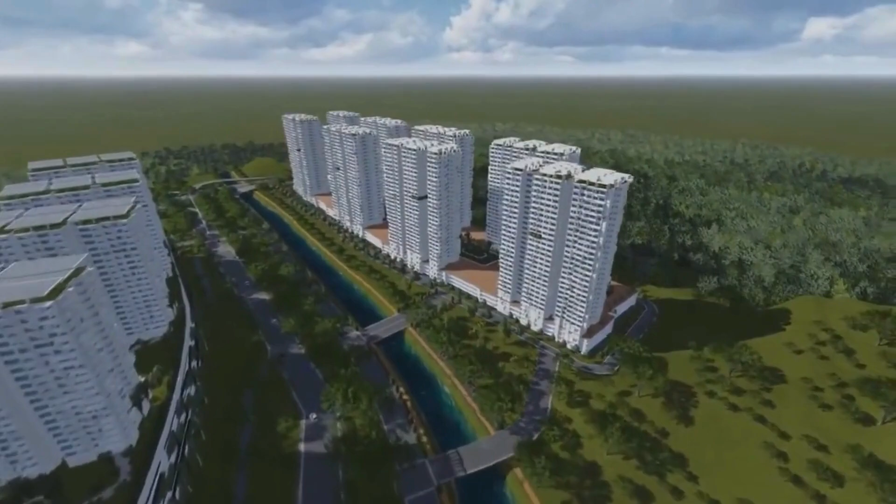In Malaysia, owning an affordable home has become harder for many families, especially those in the middle and lower-income households. One of the biggest problems is that house prices keep rising, while people's salaries don't grow fast enough to keep up. To address these problems, the government introduced PRIMA, or Perumahan Rakyat Satu Malaysia.

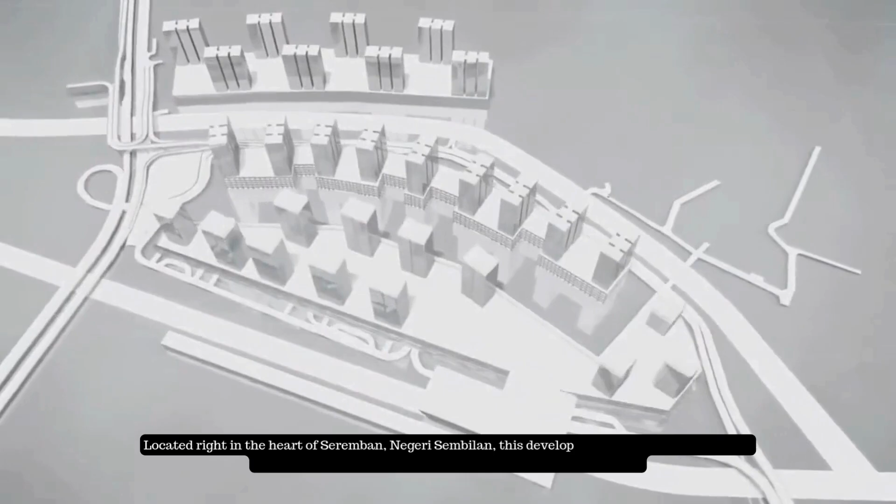One of the projects is PRIMA Residency Seremban Central. Located right in the heart of Seremban, Negeri Sembilan, this development is perfect for those who want to live close to public transport, shops and city amenities.

The project offers 1,504 apartment units across 8 25-story blocks. These units come in various sizes and layouts, ranging from 861 to 1,237 square feet, offering flexibility to suit different lifestyles and family needs. The development is also equipped with 24-hour security and CCTV systems for resident safety.

Now, let's take a look at the main stakeholders involved in bringing this project to life. PRIMA Corporation acts as the lead developer, planner and coordinator, to ensure that the project aligns with national housing goals and meets the needs of the target population.

Brunsfield International Group is also involved as a co-developer and project coordinator. They work in close partnership with PRIMA to translate planning strategies into executable construction blueprints.

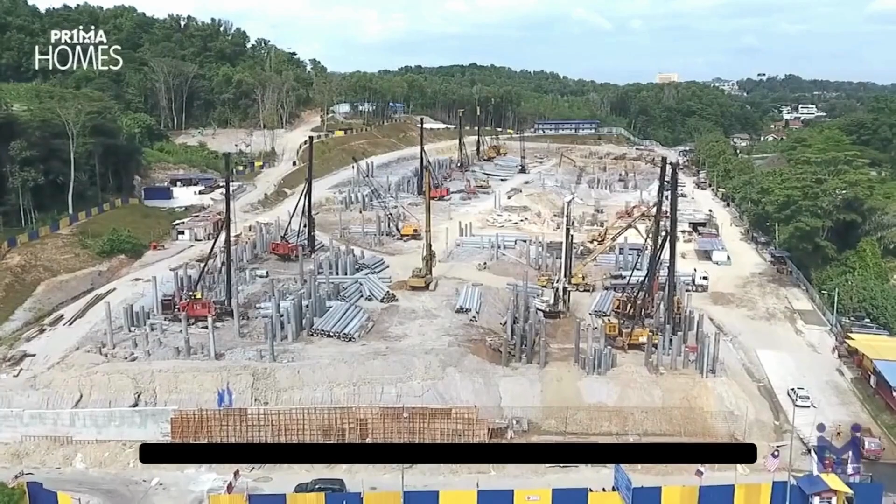The main contractor, China State Construction Engineering Malaysia SDN BHD (CSCC), ensures that the construction is carried out professionally, following the approved designs, budget and timeline.

Working closely with the main contractor team, there are design consultants and engineers who handle architectural layouts, structural designs, and technical detailing to ensure the buildings meet safety, functionality, and aesthetic standards.

Besides that, local authorities like Majlis Bandaraya Seremban (MBS) handle permits and approvals, while agencies like TNB, IWK, and SPAN ensure utilities such as electricity, water, and sewage are properly planned, installed, and fully operated.

And of course, the future residents and home buyers. PRIMA is built on good intentions and strong pillars, but like any home, it has a few flaws. Let's uncover 5 strengths and 5 weaknesses behind the project.

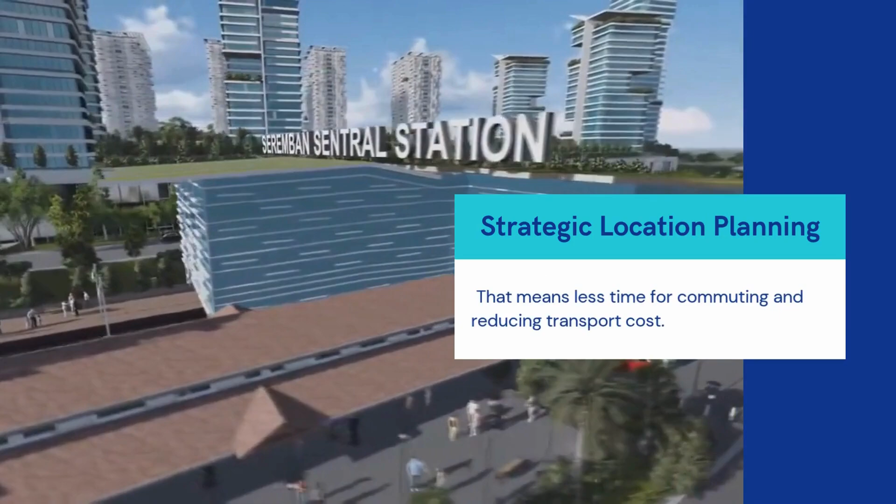First, strategic location planning. PRIMA homes are strategically built in urban and semi-urban areas, close to key highways and public transport. That means less time for commuting, and reducing transport cost.

Next, government-backed financing and policy support. PRIMA makes home ownership achievable for middle-income earners through financial solutions like end financing, stamp duty exemptions and down payment subsidies.

Third, modern design. Each home includes up to 3 bedrooms and 2 bathrooms. The homes here feel bright and airy thanks to features like open layouts, tall ceilings and large windows.

Moreover, PRIMA offers excellent comprehensive community facilities, including a gym, a library, a multipurpose hall, a sky garden, and even a kindergarten and nursery for families with young children.

Besides that, it also has wide-scale implementation across the country. It doesn't just focus on major cities like Kuala Lumpur or Johor Bahru, but also extends to smaller towns and developing areas. For example, Residency Kuala Kedah in Kedah.

Lastly, digital application and tracking system. PRIMA offers an online application platform that allows applicants to register, apply, and track the status of their housing applications digitally. One of the disadvantages with PRIMA is the application and waiting process.

Many applicants experience long waiting times with little to no updates. This is especially frustrating for those who need urgent housing solutions.

Another issue faced by PRIMA homeowners is the limited flexibility in interior design. Design options are limited compared to private developers. Most units follow a standardized layout and finish. This lack of customizability can make the home feel less personal.

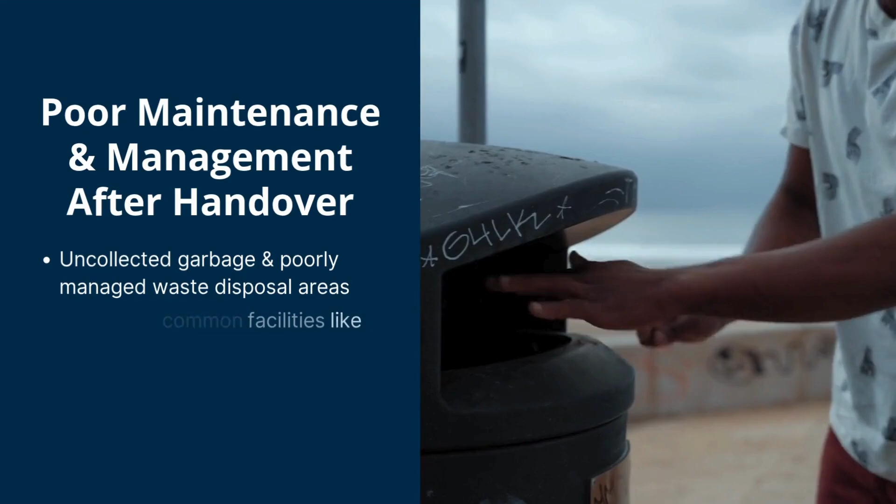Next, a common issue reported by PRIMA residents is poor maintenance and management after handover. After homeowners move in, some PRIMA projects reportedly face uncollected garbage and poorly managed waste disposal areas, damaged common facilities like lifts, lighting, and playgrounds, leaking roofs, plumbing problems and neglected corridors or parking lots.

Other than that, overdependence on government funding.

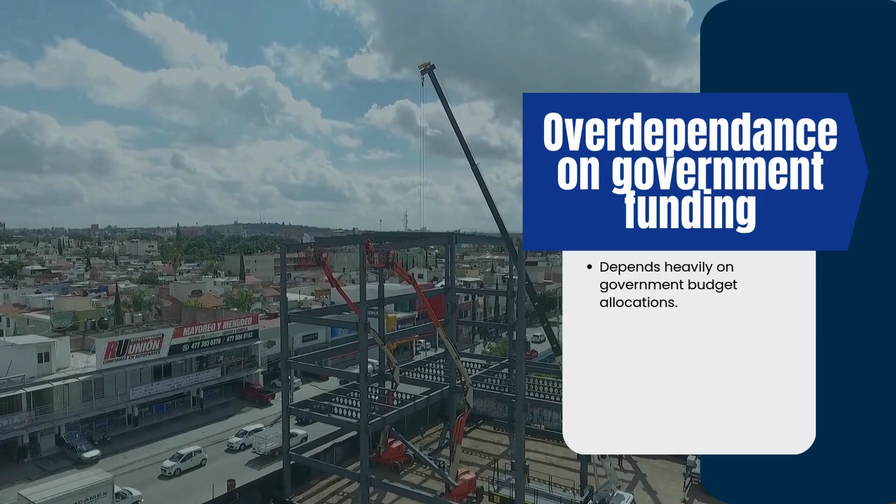PRIMA depends heavily on government budget allocations to plan, build, and subsidize its housing projects. Because of this, any political or economic changes can directly impact its progress. One such case is the Tanjung Kling project, which was cancelled because of financial constraints and feasibility concerns.

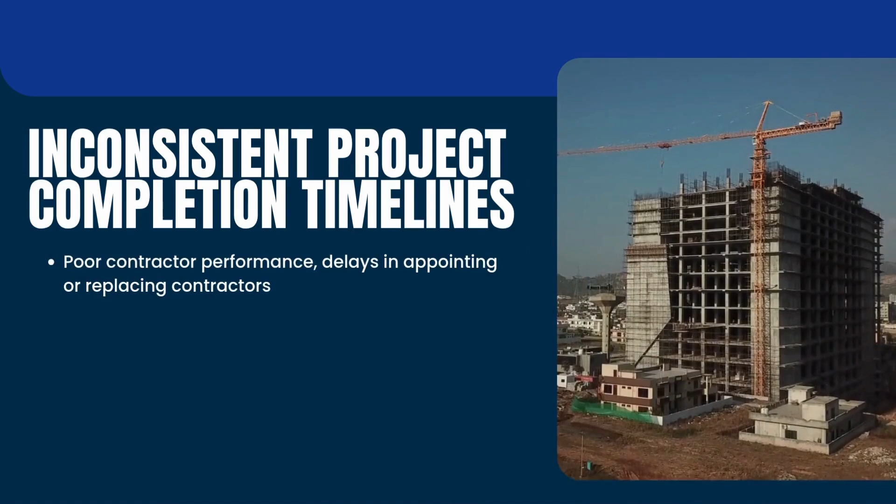Lastly, the previous issue is closely linked to another major problem, which is inconsistent project completion timelines. Some PR1MA projects have experienced delays due to poor contractor performance or funding gaps. As a result, these delays place financial strain on buyers and weaken public trust.

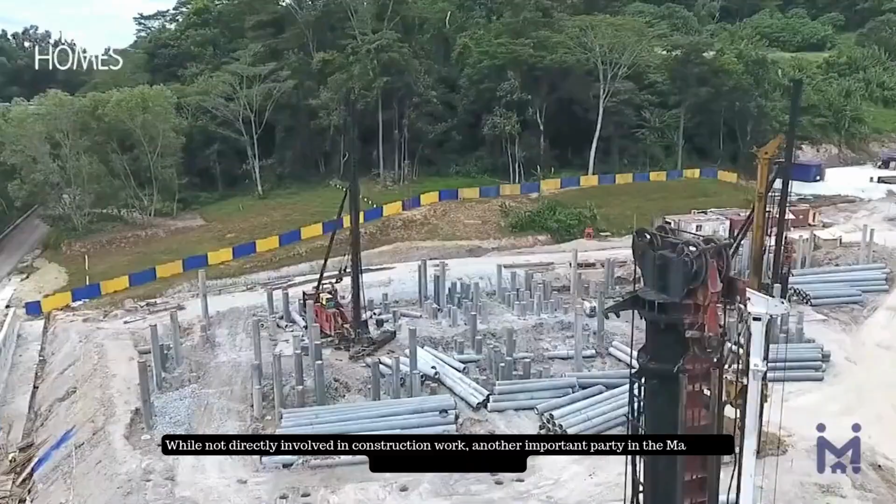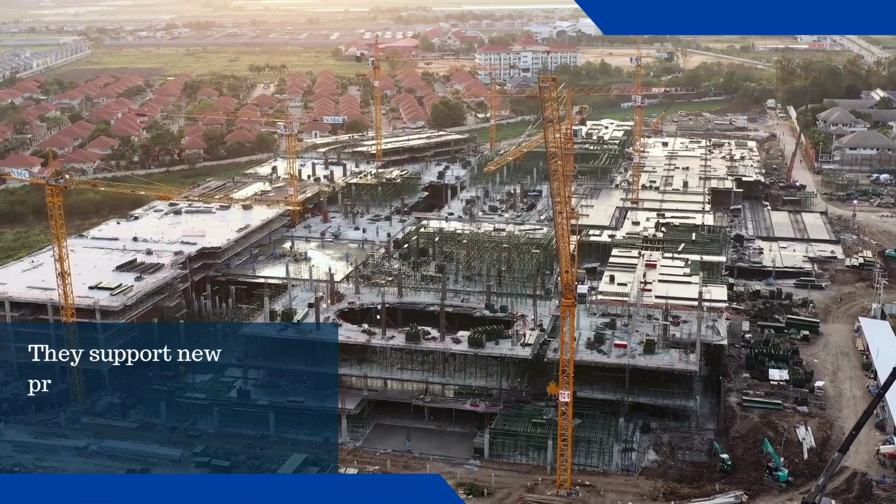While not directly involved in construction work, another important party in the Malaysian construction industry is the Construction Industry Development Board, CIDB. CIDB is responsible for stimulating growth and progress in the construction industry. This means they support new projects and help the industry expand in both quality and scale.

CIDB also regulates the standards for construction workmanship and materials. They must ensure that construction work and materials meet established quality standards to maintain safety. Additionally, CIDB provides consultancy and advisory services to guide construction stakeholders in making informed decisions and comply with industry standards.

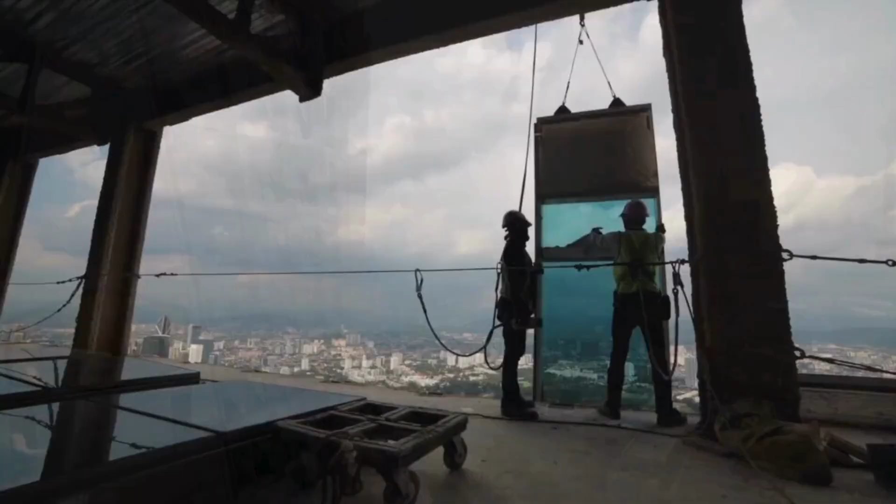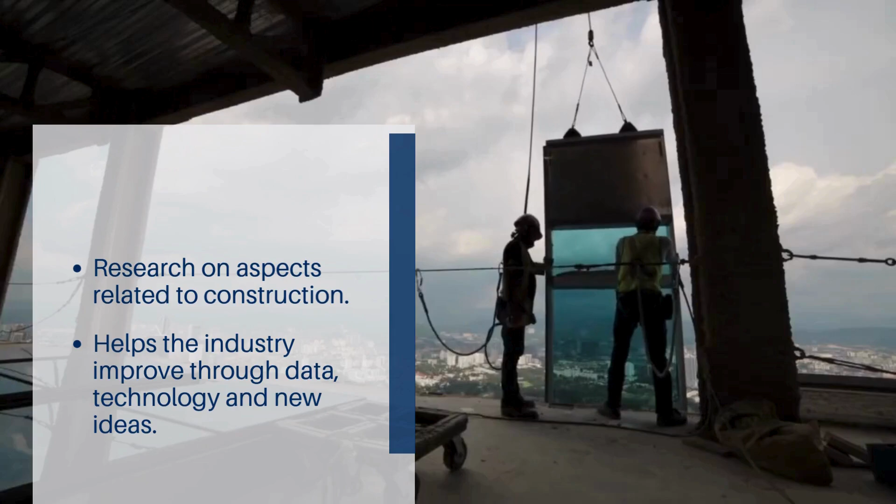Furthermore, CIDB supports innovation by promoting, stimulating, and undertaking research on aspects related to construction. This helps the industry improve through data, technology, and new ideas. Lastly, CIDB ensures and encourages quality assurance, safety, and long-term performance in the industry. Developers and contractors must follow CIDB's guidelines throughout the project.

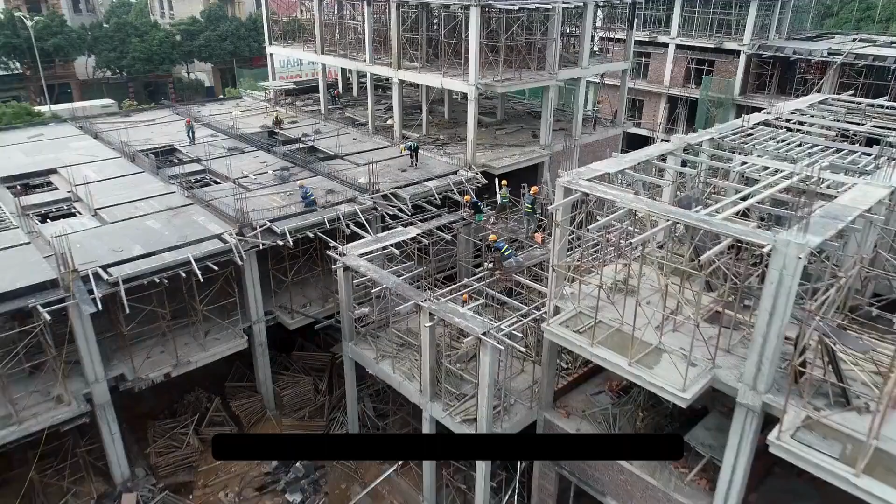When it comes to construction, choosing the right materials is not just a matter of preference, it's a necessity. First, it ensures structural safety. Using the right materials ensures that buildings can support loads and resist natural forces like wind and earthquakes. This helps protect lives by making buildings strong and stable.

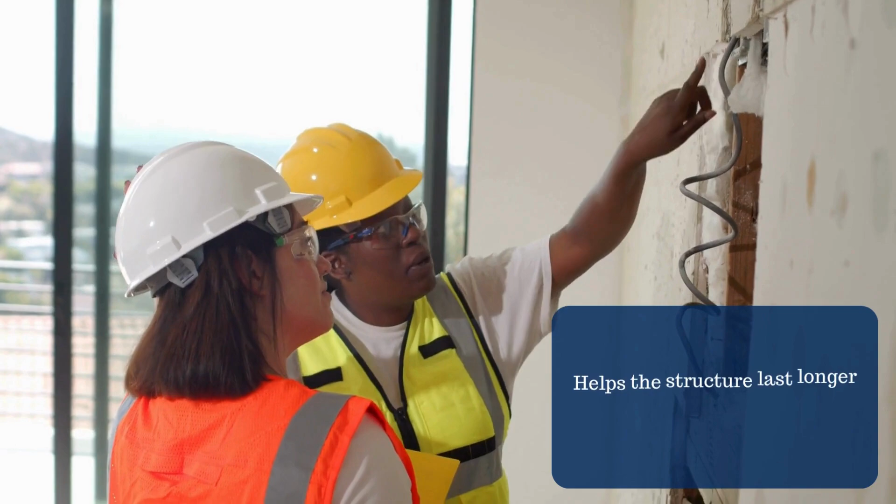Next, durability is important in construction because high-quality materials are strong and resistant to damage over time. They reduce the need for frequent repairs or replacements. This helps the structure last longer and stay in good condition.

Third, it is for environmental sustainability. Eco-friendly materials help reduce pollution and limit the use of non-renewable resources. They also promote green building practices that are better for the planet and align with modern environmental goals.

Additionally, cost efficiency is an important reason for selecting the right materials in construction. Using the right materials might seem expensive at first, but it is actually a smart investment. Strong and durable materials can last for many years without needing frequent repairs. This helps save money over time because the building won't need to be fixed or rebuilt often.

Affordable housing is no longer just a financial issue, it's a growing social concern for the Malaysian young generation nowadays. To help struggling young Malaysians, the government must enhance financial assistance and accessibility. This includes expanding and promoting schemes like Rent to Own, My First Home, IBIAYA, and the Housing Credit Guarantee Scheme. These programs offer easier financing, smaller down payments, and support for gig workers without fixed incomes.

Next, the cooperation between the federal government, state authorities, and private developers must be strengthened to ensure housing targets, like the 500,000 affordable units under the 12th Malaysia Plan, are met on time and on budget.

Third, policy coordination and implementation should be improved. Developers must be required to conduct feasibility studies to ensure housing prices remain within the financial reach of target groups. Also, housing policies should be continuously reviewed and adapted to reflect changing economic conditions and the evolving needs of youth.